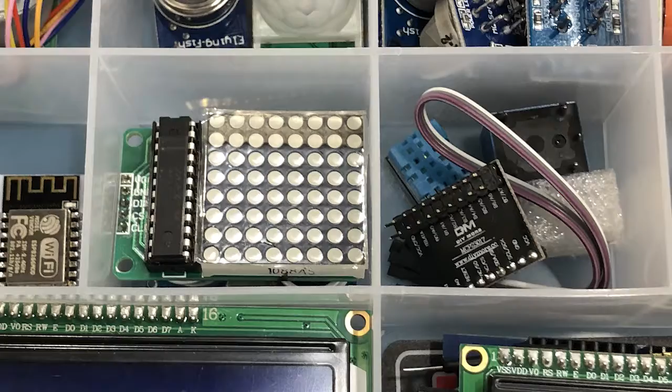To make something awesome. In the makerspace, I'm working on developing some environmental sensors that will track things like temperature, humidity, barometric pressure, and air quality using common, off-the-shelf electronics. Of course, no electronics project is truly complete until a suitable enclosure has been built to contain said electronics and keep them protected during operation.

While it is not uncommon to see repurposed Tupperware containers or plastic storage bins used as improvised project enclosures, having a custom designed enclosure adds a level of polish and professionalism to any DIY project.

Before we get started, it's worth pointing out that project enclosures are an often discussed topic in the maker community, and as such, there are a ton of great resources already out there to help you get started or provide inspiration. One of my favorite maker websites, hackaday.com, has a large collection of articles covering many facets of enclosure design. In the search box, just type in the word enclosure and you'll see what I mean.

There are many ways to fabricate an enclosure. Cardboard can be a quick proof of concept when first laying out a design. Laser cutting can create large or small enclosures from wood or acrylic. And 3D printing can create a wide array of enclosures with complex geometry or parts that snap together.

Which technique you choose is largely a decision based on the needs of the project and your goals as the maker. The makerspace at Exploration Commons has 3D printing, laser cutting, and CNC routing as possible techniques for fabricating a project enclosure. For today's project, we'll be using 3D printing.

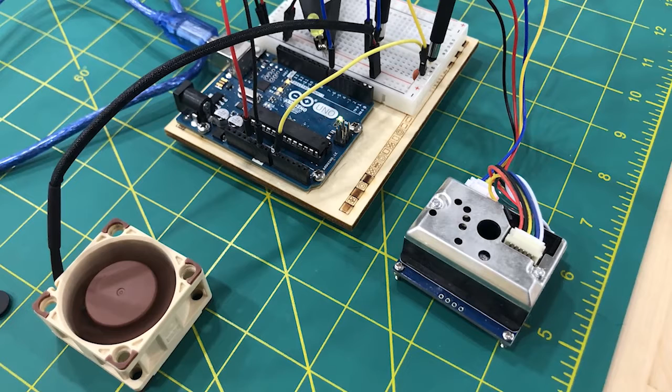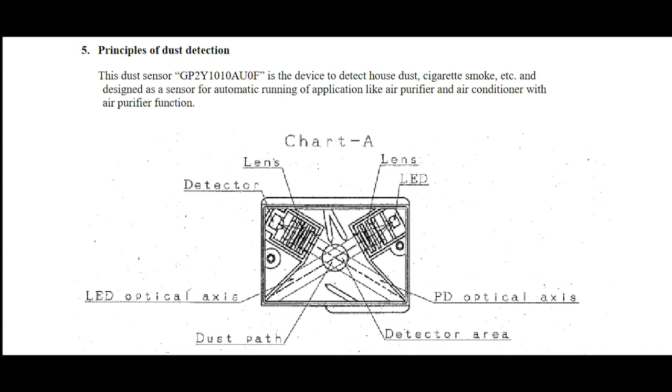Let's take a look at the parts that are involved in this project, all of which are available online and have been sourced from Amazon.com. First, we have a Sharp GP2Y series air quality monitor that can detect smoke and dust. The sensor operates by shining an infrared light into a detection chamber and sensing the reflected light as dust or smoke particles pass through. To force air through the case, we have a single 20 by 40 millimeter fan, and it will operate at low speed to allow time for the dust particles to be detected by the sensor.

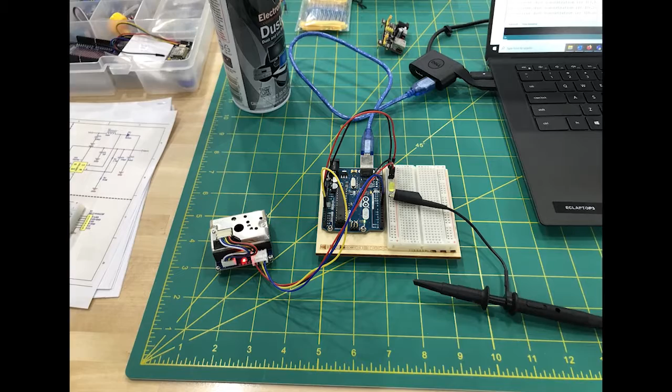To read the sensor and communicate data back to our server, we have an ESP8266 Wi-Fi enabled microcontroller and a small breadboard to make electrical connections. Finally, to power everything, we'll dig into the junk box and rescue an iPhone charger to provide 5 volts USB. Since these parts are part of a larger project we'll be featuring later, I'm not going to cover the programming or electrical work necessary to get them working together. Today, it's all about designing the enclosure.

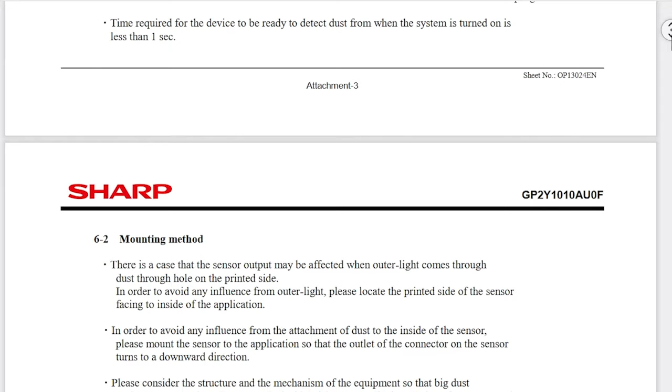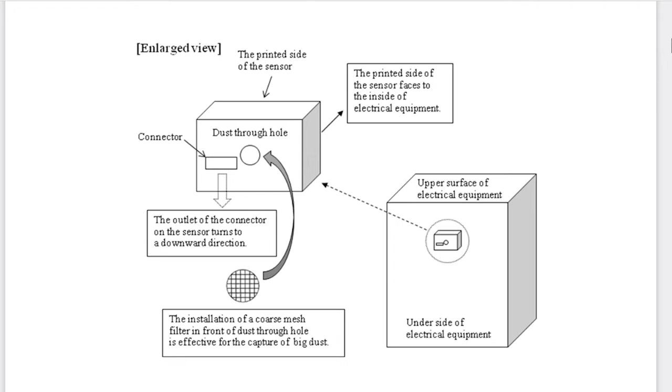The first step is a survey of potential design constraints. The manufacturer's datasheet for the dust sensor has specific instructions for how the sensor should be mounted inside of the application. To prevent contamination of the sensor and avoid measurement errors associated with stray external light, the sensor will need to be mounted with the circuit board side facing away from the outside of the case and electrical connectors facing down. Another consideration will be how the device is mounted in its final position for operation.

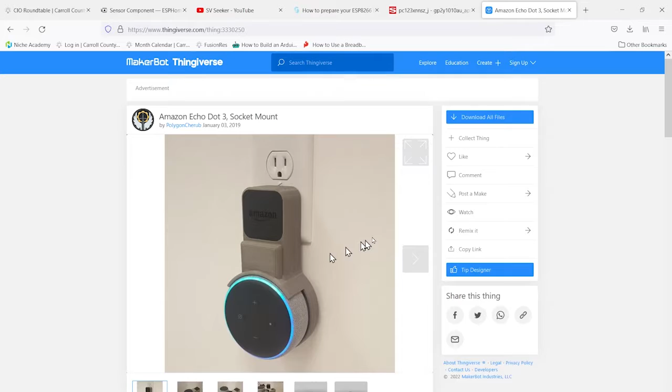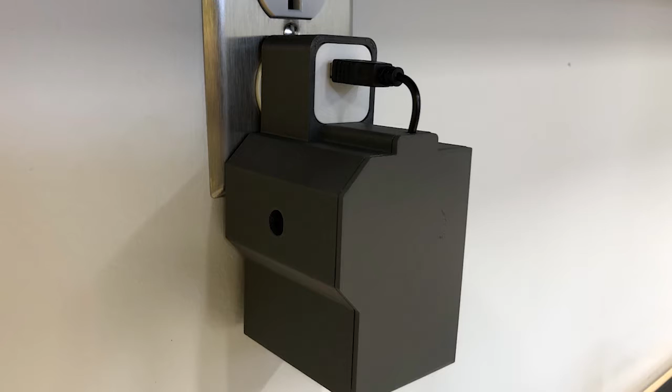Will it sit on a table? Be mounted to the wall? Drawing some information from makers who have crafted mounting brackets for Amazon Echo Dots, I think we'll design an enclosure that attaches to or integrates with the AC adapter. This way the sensor can hang just below the wall outlet, be out of the way of anyone working in the room, and have a clear path for air to enter and exit the enclosure.

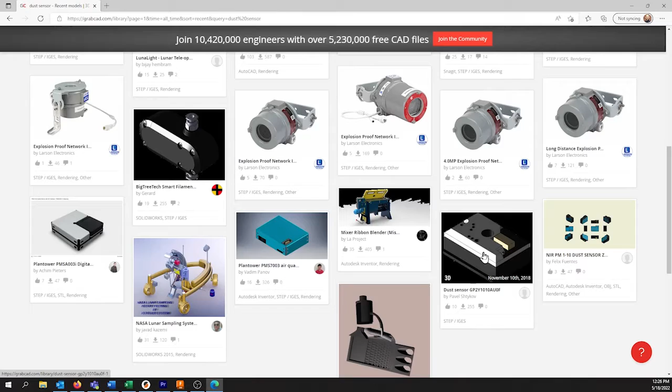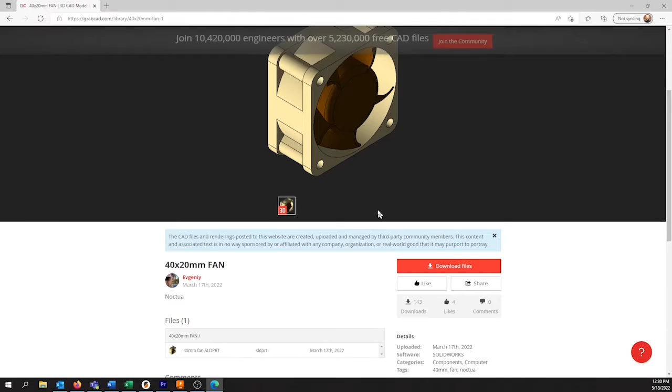When designing an enclosure for a project, I like to have CAD models for all of the parts that will go into the enclosure so I can easily visualize what the final project will look like. What is important here is to have models that accurately show the location of mounting holes, electrical connections, and be dimensionally accurate. It's not important to have pretty, well-polished models that can stand on their own. A few rectangles, squares, or cylinders are often all that is necessary.

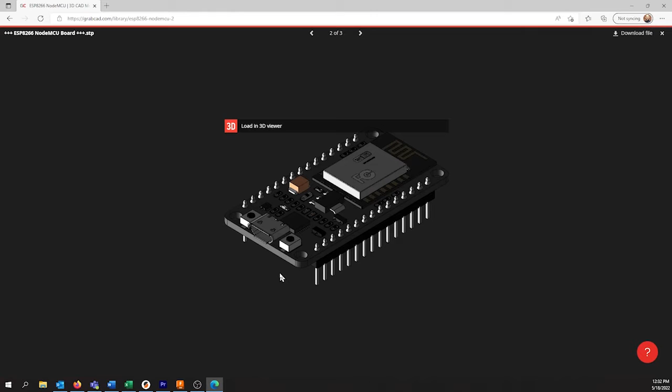Before spending the time and effort creating these models, check online resources like grabcad.com or Thingiverse to see if other makers have posted models of the parts you're using. All the parts that I'm using today were found on grabcad.com, so I downloaded the .step file for each and imported them into Fusion 360. The dust sensor was missing the circuit board, so taking a few moments with a caliper, it was easy to add that feature to the model.

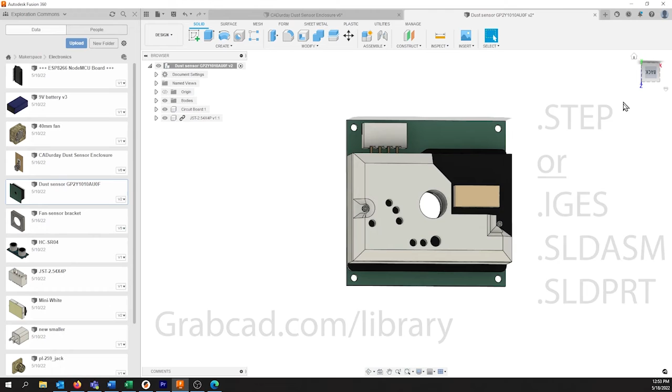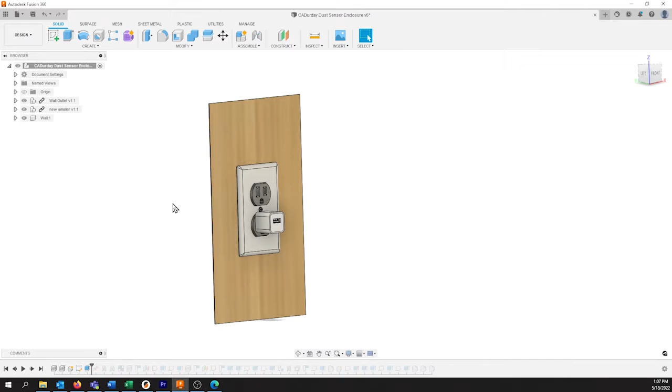Let's get started. The first thing I'm going to do is set the scene by importing a standard AC wall outlet and defining the wall surface. This is not technically necessary, but I think it's quite useful in helping us visualize the design as it evolves and takes shape. Let's add some color to the wall and outlet to make this look more natural.

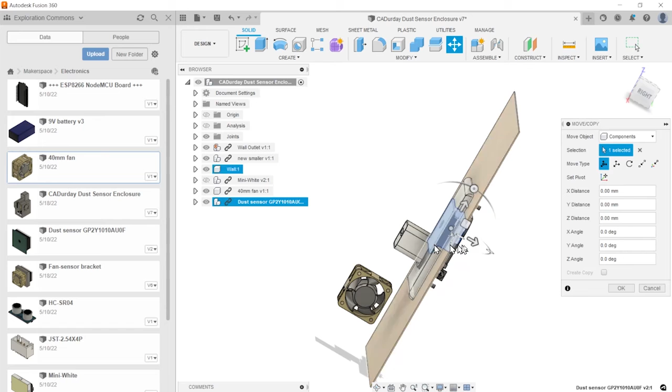The first part we'll import is the power adapter and get it placed in the wall outlet. Now let's place the sensor and the fan. Remember, the sensor must be positioned horizontally and with the electrical connections facing down. The fan will pull air through the sensor, so at some point we'll need to design a bracket that will join the two together, but also secure to the case. We'll cross that bridge shortly.

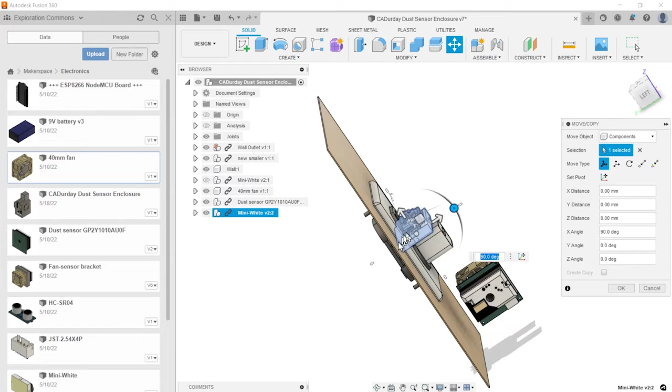With the fan and sensor positioned roughly, let's bring in the electronics board and see where a good place for it might be. Some things to keep in mind. We'll have to power the electronics and have enough room to route cables and make connections. Since the wires for the sensor are facing down and only a single wire needs to be run from the power adapter, I think we'll place the electronics underneath of the fan and sensor.

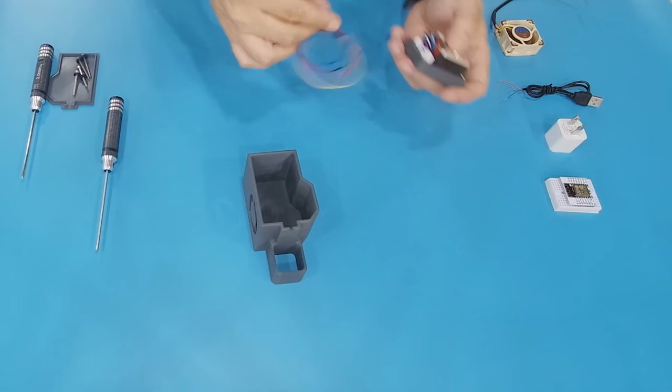One of the greatest challenges in designing any part is always keeping in mind the assembly process. In CAD, it's very easy to move and position parts in a way that is not possible in the real world, or would create a headache when it comes time to assemble a finished project. How will wires be routed? What order do the parts fit in? Is there enough clearance?

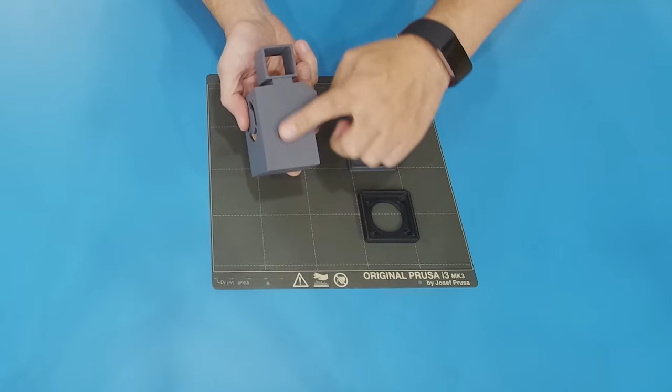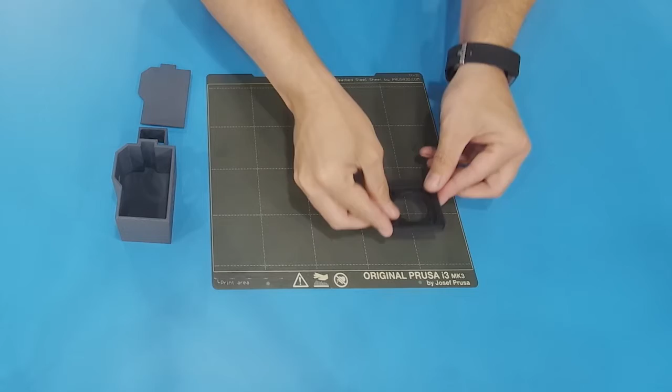Now consider the limitations of 3D printing. One side of the project will have to be facing the build platform, and as such should be flat and free of features. While it is possible to add supports to that side if necessary, I like to avoid it altogether and plan for one side to be the build platform side.

The first idea was a simple box with two open faces, allowing easy access to the internal components, and a cover that would seal the enclosure. Aesthetically, this is about as exciting as homework over the weekend, and is perhaps a little too simple.

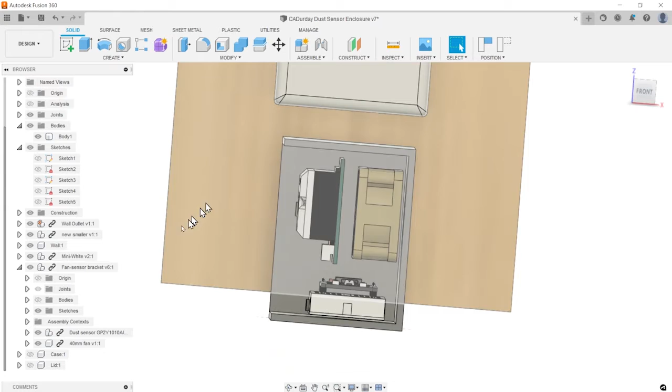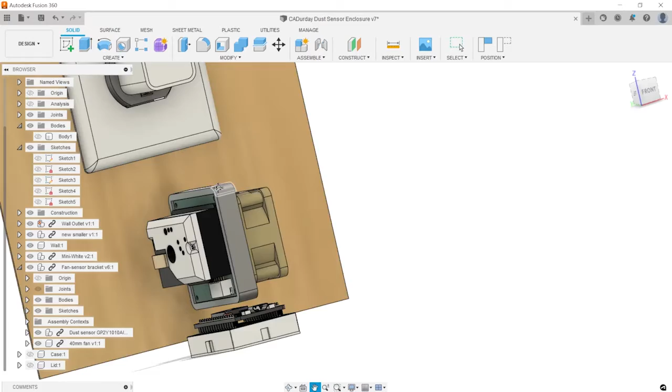Thinking back to how the project will be assembled, I think we first need to join the sensor and fan together with a bracket such that they can be treated as one component. It will be secured to the case by bolting through the fan to the case and then to the bracket. Ultimately, I want the case to have only one open side, and for the parts to slide in and then be bolted through.

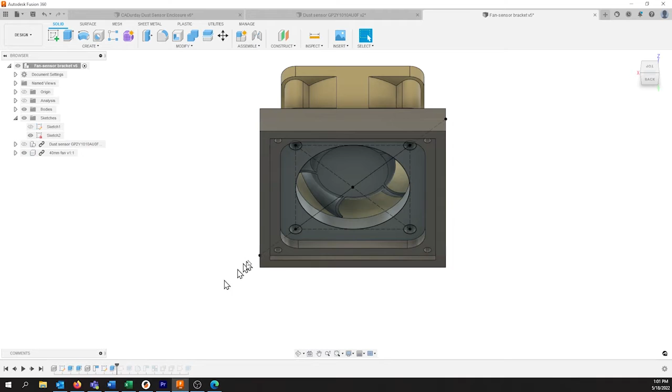The sensor has four 2mm mounting holes that came with some hardware already. Since this is a low-stress part, undersizing the holes on the bracket will allow the M2 machine screws to bite into the plastic, forming a strong enough bond. The idea is to have four bolts that will enter from the side of the enclosure, pass through the fan, and then fasten to the plastic bracket, sandwiching the fan between the enclosure and sensor bracket.

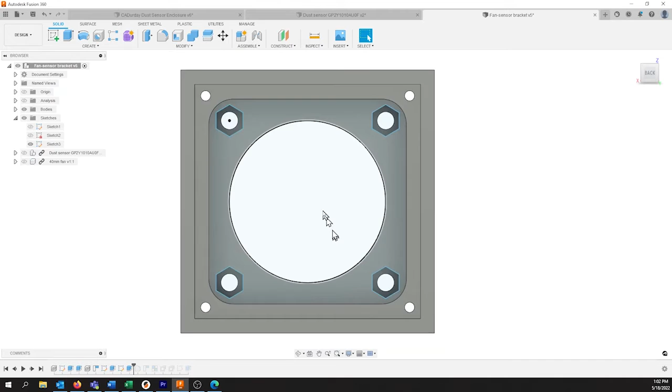One of my favorite 3D printing tricks when it comes to fastening hardware is to embed hex nuts in the printed part such that they become encased in the finished print. When slicing the part, just prior to printing, add a color change command to force the print to stop at the last layer before plastic is printed over the hex nut.

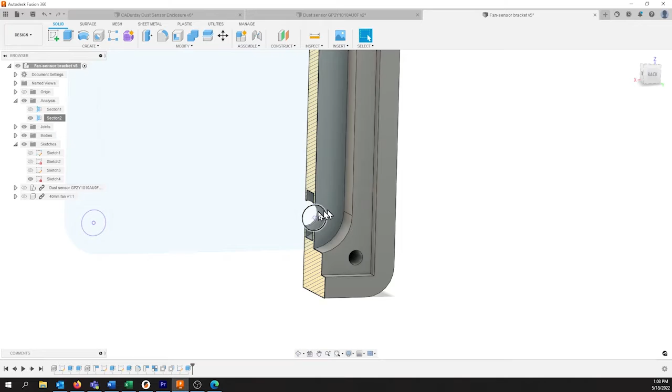This fake color change causes the printer to pause and sound an audible alarm letting me know it's time to insert the hardware. While it is possible to undersize the holes for the four larger bolts as we did for the sensor, having machined hardware allows for easier assembly and greater durability.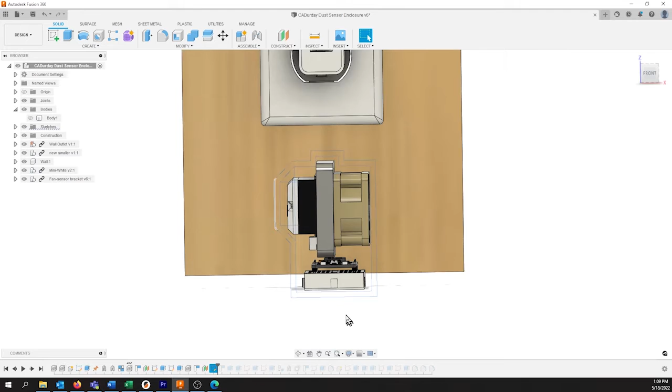Now that the sensor and fan can be treated as one unit, and we know how it will secure to the enclosure, it's time to reimagine the overall shape of the enclosure, taking into consideration our previous requirements. I've chosen the build platform side to be the side that faces the wall, and the open side to be opposite of that face. To create the shape of the enclosure, I'll draw a line around the profile of the sensor and fan, leaving room underneath for the electronics.

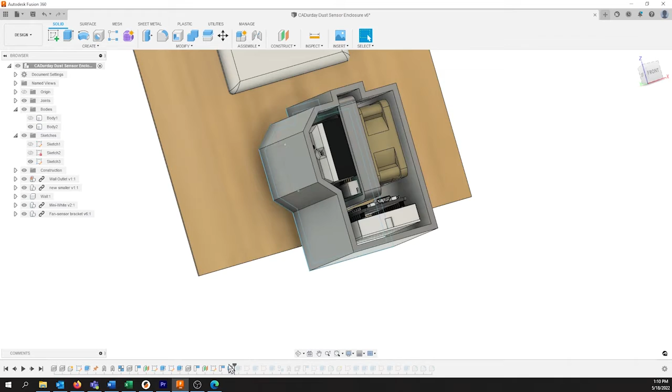The wall thickness for the enclosure will be 3 mm, so offsetting the drawn line by 3 mm and then extruding will give us the shape we want. Next, we'll need intake and exhaust

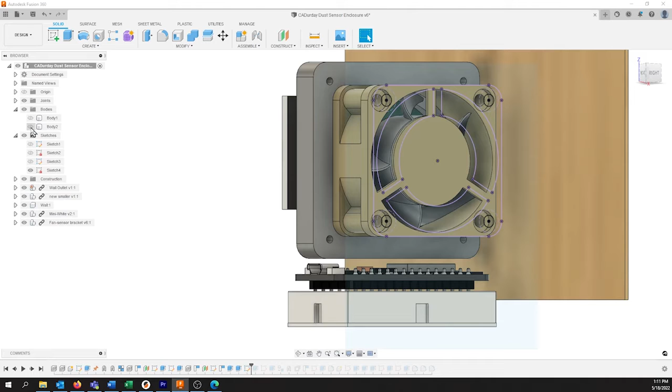ports. I'll use the projection command to project the geometry of the fan onto the enclosure wall and then perform an extrude cut to create not only the exhaust port, but also the holes for the bolts. Just how easy this was really highlights the usefulness of having CAD models for the parts you're working with. I'll repeat the same process for the air intake by projecting the intake hole on the sensor to the corresponding enclosure face and extrude cutting.

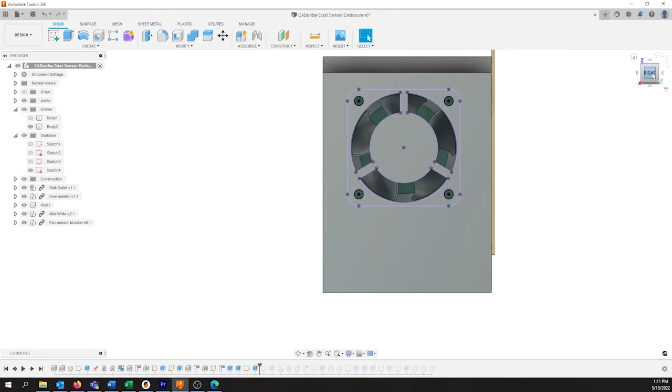Next, let's position the case under the power adapter and imagine how it might be secured to the case. I measured the CAD model as well as the power adapter, and they're only off by a millimeter at most. I'll use the measured dimensions in creating the geometry that the adapter will slide into. I want the fit to be snug, but not impossible.

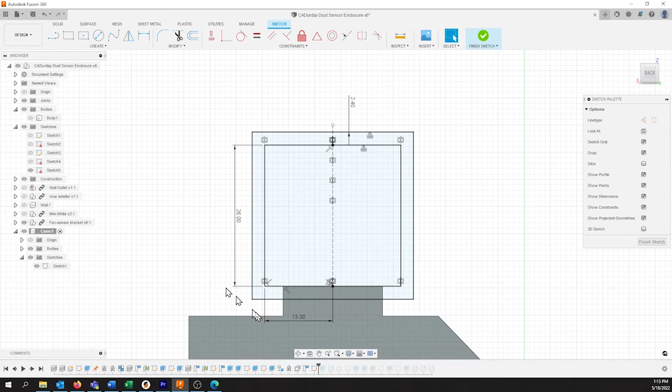At this point, I exported the enclosure and printed just the power adapter bracket. This way I can test the fit as designed and come back and make small adjustments as needed. From within Prusa Slicer, it's possible to make plane cuts of an object to break it into multiple objects. I use this technique to print features of an unfinished design that I want to test fit in real life without having to print the entire part.

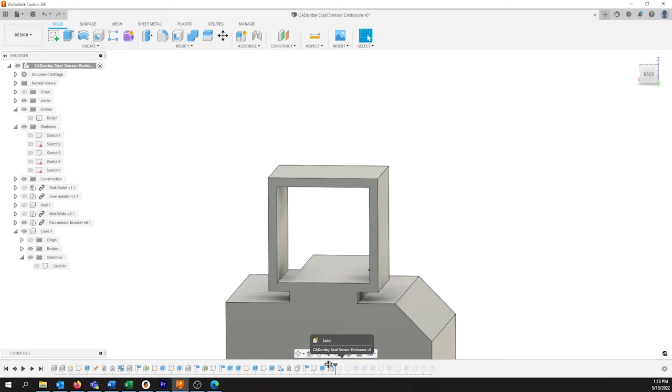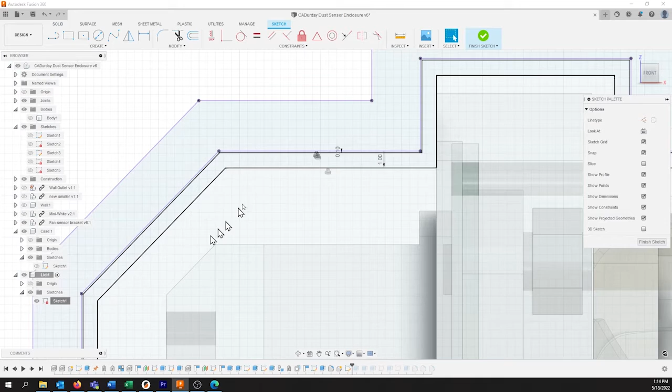Overall, I'm happy with how the power adapter fits, so now it's time to move on to the final feature of the design, the lid. Immediately it becomes apparent that the lid will be press fit into the case and held by friction. To create the lid, I'll project the enclosure geometry onto a new sketch and use the offset command to create the sidewall. How much of a gap to leave between the enclosure geometry and the lid sidewall will require some trial and error. To start, I'm using 0.1 millimeters of clearance and the sidewall will be 1 millimeter thick.

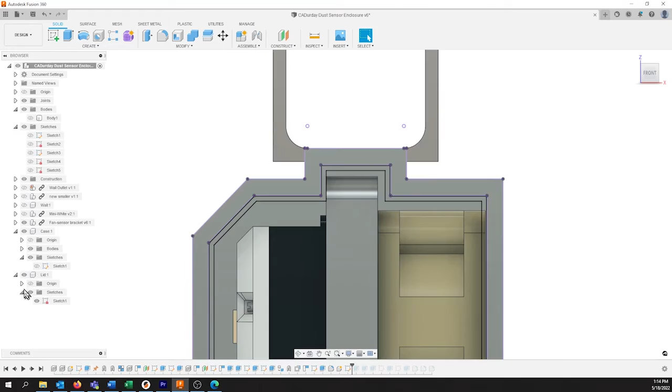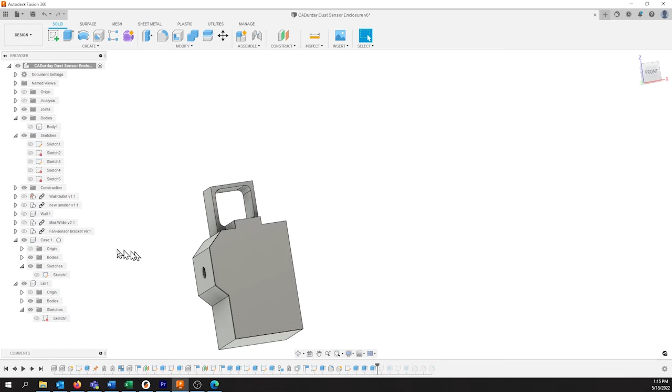In practice, I found that 0.1 millimeter works well when the lid is printed in draft quality. It fits snugly and is secure. However, when printing the part at a higher quality setting, the lid no longer fits properly or is snug, and as a matter of fact is quite loose. Once again, be mindful of print settings, as it is very common to print in draft quality when designing something to save time, but when set to fine quality, some parts may not fit as intended.

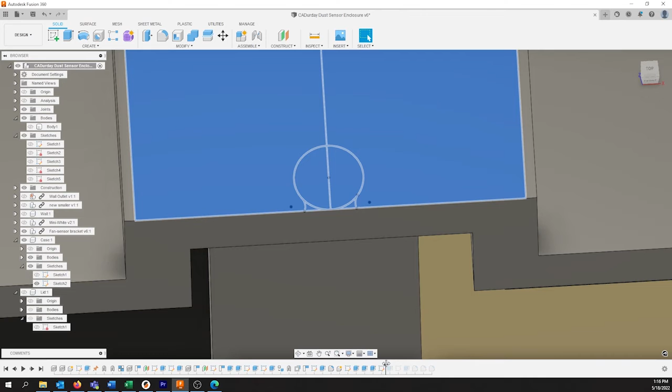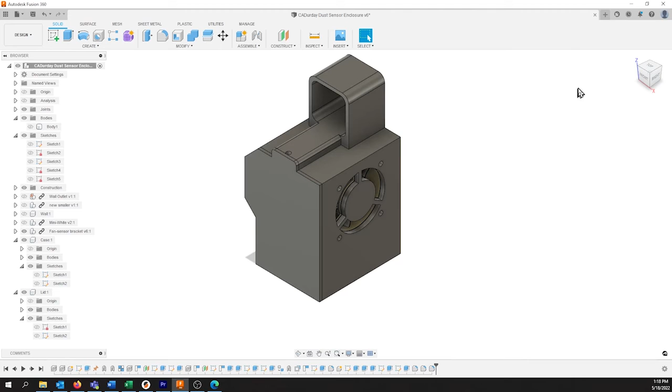With the lid complete, the last detail needed is the routing of the power cable. Digging through the random box of cords, I found the thinnest cable and measured the diameter with a caliper. Using that measurement, I created a sketch on top of the enclosure at the front and used the extrude cut to create an opening to pass the cable through. The last step was to project the new opening onto the lid so the sidewall will have a corresponding gap, allowing the cable to fit neatly into the enclosure. Finally, I'll round a few edges and corners to smooth out some sharp edges, and the project enclosure is complete.

The final assembly went smoothly. Sandwiching the fan and sensor bracket together and sliding the assembly in until aligned with the four holes was easy enough. I used a screwdriver to hold everything in alignment and one by one secured the assembly using 4 bolts. The bolts I had were just a little too long, so a few plastic washers were used to adjust the fit. Earlier in the design phase, I should have considered the hardware length of what I had on hand.

For now, I'm going to tuck the wires in, and when the electrical design phase is done, I'll come back and trim everything down. Overall, there is ample room in the enclosure for the microcontroller, and I hope to add additional sensors such as temperature and humidity later on. Routing the USB power wire went exactly as expected, and the lid fits wonderfully.

All of the tools, software, and machines used to develop this project are available for use in the makerspace at Exploration Commons. It is my hope that this project has given you inspiration to learn more about computer-aided design as well as insight into the possibilities and joy of making.